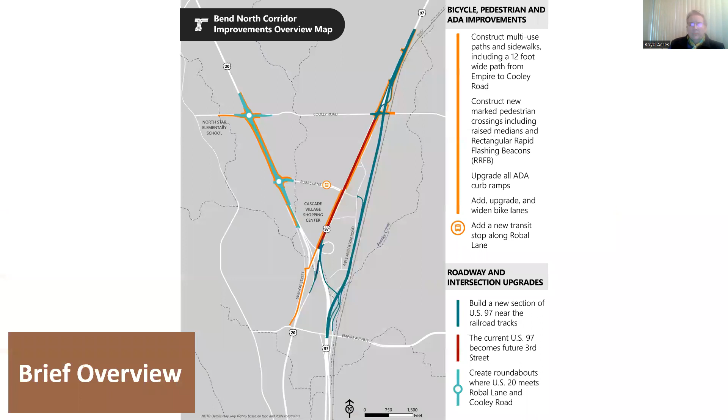This is kind of a 20,000 foot overview of what's going to be happening on this project. You're going to see a couple plan sheets and roll plots, and you'll notice they're going to be oriented differently to make them fit on the screen, so I'll try to remember to tell you what you're looking at and how you're oriented. For this picture, north is up. To give you an overview of the work occurring on this project, you'll see Cooley Road going east-west on the top, Robal just below that, and then the V that US 20 and US 97 make.

Starting on the US 20 corridor, we're building two roundabouts, one at the intersection of Cooley Road, one at the intersection of Robal Lane. You're also going to see multi-use paths on both sides, more on that later. For existing 97, where it's at today, we're going to be doing preservation work, upgrading the ADA ramps and curb ramps in that area, and adding additional bike ped facilities. And then on the east side, the darker blue line is the US 97 realignment. That's going to be kind of like a through route of 97, almost an extension of the parkway, off to the east, and that will get a lot of that through traffic and congestion out of the lights at Cooley and Robal.

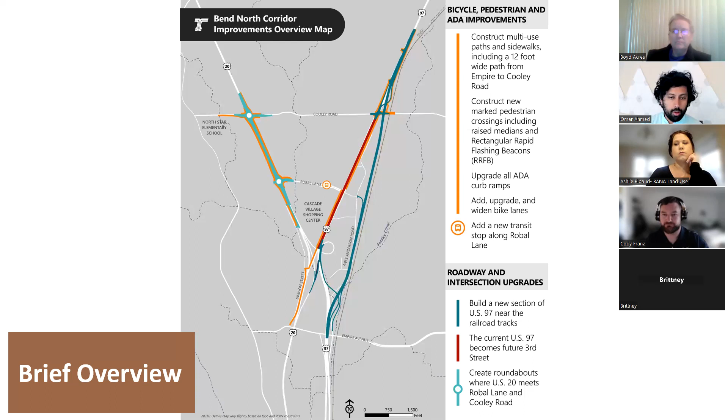Oh, one more thing. We are building a quiet crossing at the BNSF Railroad at Cooley Road as well.

This is to focus in on the bike ped improvements on the project. Again, this is all available on our website in higher resolution if you want to look at it there. Starting on the 20 side, north is up. We're going to have 12-foot wide multi-use paths on either side, running north and south.

You're going to see rapid flashing beacons for pedestrian safety for crossing at 20 and Cooley, 20 and Robal, as well as closer down to Jamison, over by the fire station. You're going to see ADA improvements along this route.

On existing 97, you'll see a 10-foot path and a 12-foot path, depending on the section and area. You'll see that jog over at Robal as well, making sure there's a safe, functional crossing there for pedestrians. That path will continue up north all the way through to the end of our project limit.

It'll jog over again to the east at Cooley and then head north from there before getting to the railroad tracks. Along with the quiet crossing we're building at the railroad tracks, we will have an improved pedestrian crossing at the rail as well.

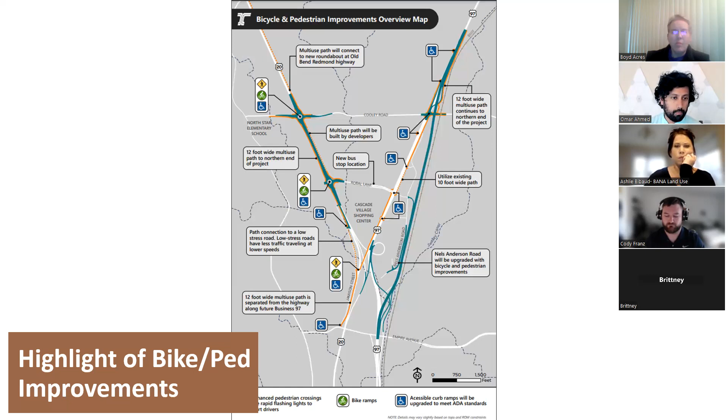So now we're going to get to the meat of the work. This is a colored roll plot of the different phases and stages of construction occurring for our project. In this image, north is to the right. I really like this, so we're going to be coming back to this screen quite a few times throughout the rest of this presentation.

Everything color-coded is reflected in the legend in the top left. That legend is essentially like a Gantt chart calendar showing when we intend for the work to be done. One of the unique properties of our project is that our contractor has been designing and building the work simultaneously, so as a result we're able to get it done sooner. If you've been out on US 20 recently, you've seen them doing quite a bit of work out there while they were concurrently designing and finishing up design for US 97.

So it's one of the benefits of this type of work. You're going to see me focus quite a bit more on the US 20 phases because that's done, concrete, set in stone. The US 97 work is more of an estimate, so we'll get to that near the end.

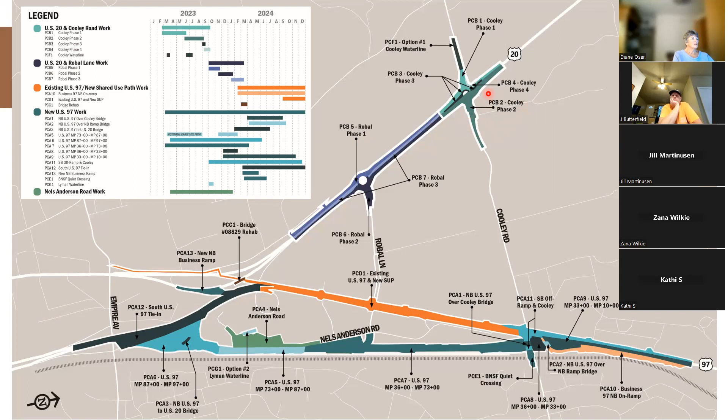So let's start at US 20 and Cooley. I think I have a little laser pointer function I'm going to try to use here. We'll start with where we're at today, which is working in phase 2.

This is a plan sheet, one of our actual construction plan sheets for the Cooley and 20 work. This is stage 2, which you can see is going to be running from April, last month, through Memorial Day. If you've been out there right now, north is to the left now. You'll notice traffic's already pushed to the east half, or sorry, west half of the new roundabout alignment.

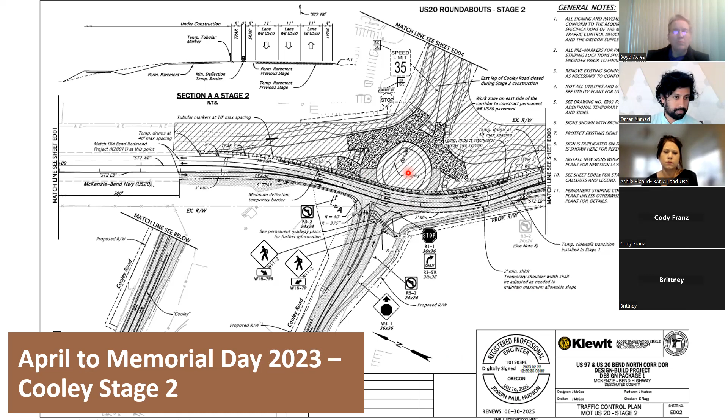Traffic's going to stay there while the contractor works on the east side. Due to that, we do have a closure on the east side. You see the blue hash describing our detour route as a result of that. We expect this to go on right up until Memorial Day, possibly the week after.

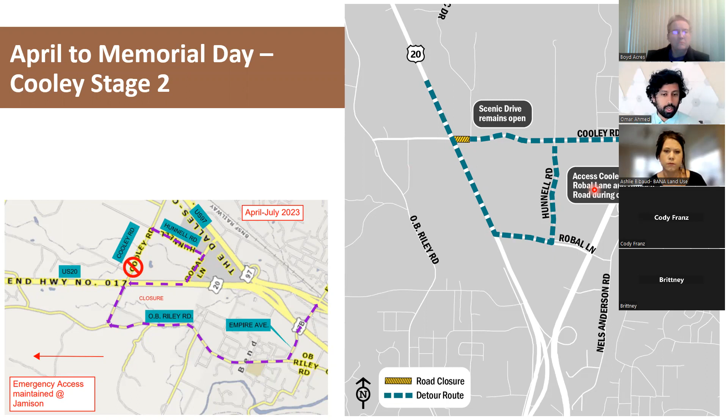Going back, we're going to have our third stage of the Cooley and 20 intersection, which is going to be the center of the roundabout. Here again, north is to the left. You'll see a single lane of traffic going US 20 west/north and a single lane of traffic going US 20 south/east.

So we're maintaining a single lane in either direction configuration while the contractor works in the center of the roundabout and completes that part of the circle.

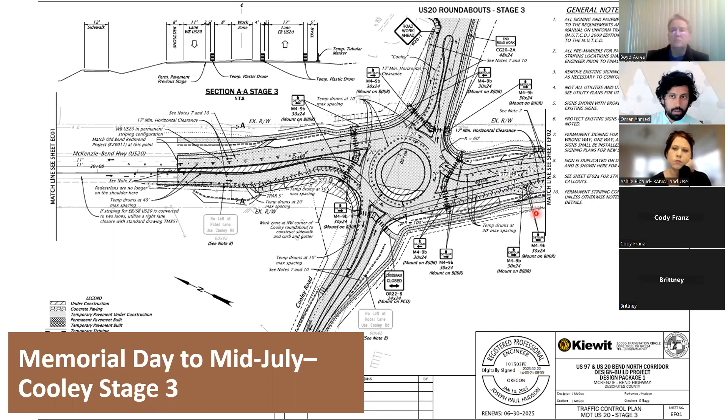Going back, once they finish up the 20 and Cooley roundabout, they're going to hop over to the 20 and Robal roundabout, so we'll talk about those phases. For stage 1 of Robal, you're going to see that start pretty much as soon as Cooley is cleared out. So Memorial Day, and you can expect it to run through mid-July.

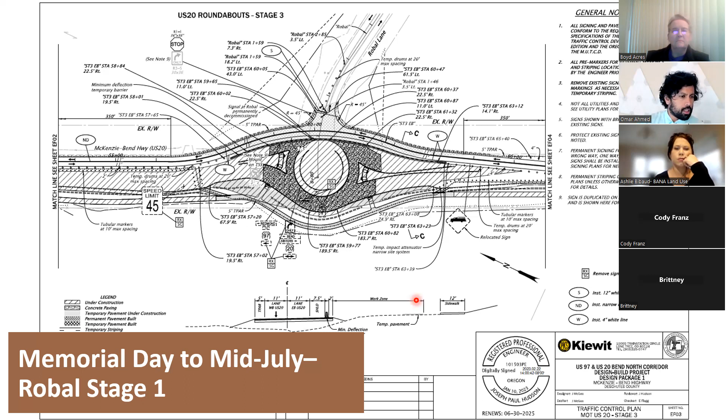In this configuration, both single lanes of westbound and eastbound US 20 traffic are going to be pushed to the east side, the mall side of 20. That will free up space for the contractor to work on the whole west end of the roundabout, which right now is functionally a dead end. It'll continue to stay that way. No major closures for this stage 1.

So as they're wrapping up stage 1, they're going to flip over. Stage 2 will run from mid-July through around mid-September is what we're tracking. Again, north is to the left, and you'll see that traffic is now switched over to the west side, the far side from the mall on 20. Again, single lane in each direction.

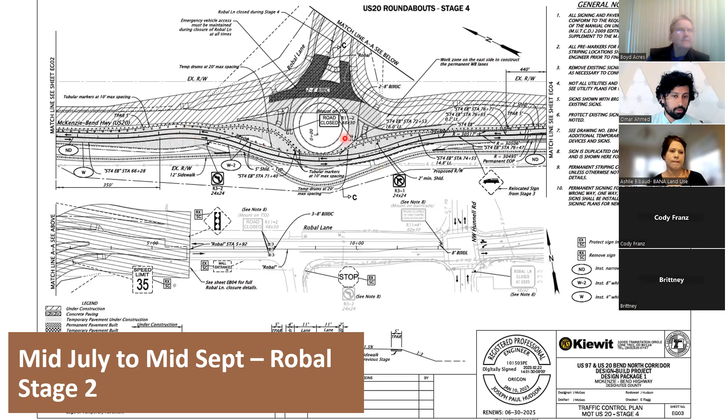So this does require a closure of Robal at the 20 currently light. And this is an image of what that looks like. You'll have to take Cooley to Hunnell and then back. And again, this section of Hunnell is relatively clear.

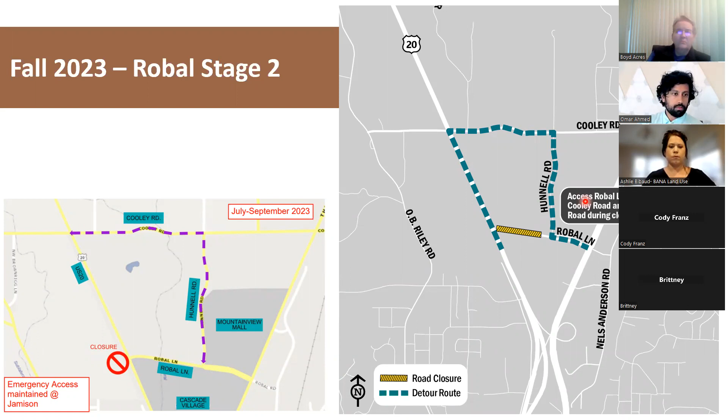So that kind of will wrap up the bulk of the impacted US 20 construction. Once both roundabouts are done, it'll free up room for the contractor to work in this center section here. They would have pushed traffic to either side, and they're going to have to build a median there. So that's what they'll be working on, and that'll continue on down.

We're building a new entrance for the fire station to have a more direct access onto 20. Right now, they have to kind of jog over and then have kind of a weird left turn. So we want to help them out there. Obviously, there's other emergency response services out there that we want to make sure have appropriate access as well.

So are there any questions on the scope of the 20 work or what's happening when? Okay, sounds good. I can't see the chat, so if someone wrote something, just yell at me.

Next, we'll talk about 97 work, which is wrapping up final design, and we'll be starting in earnest here soon. If anyone's been over to Chipotle or Chick-fil-A or anything like that, you would have seen all of the staging and work that's been happening out there already. If you can try to imagine, that's where the new highway alignment is going to be.

Along with that, there's going to be new rebuilding and realignment of Nels Anderson Road. Right now, that kind of used to go to the old Instant Landscaping location. We've actually moved them further up the street, and we're going to dead end that road. So we're going to realign Nels Anderson so the existing businesses out there can still maintain access.

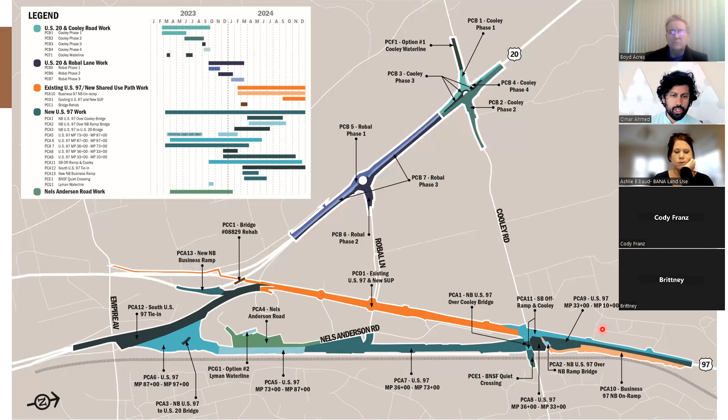Typically, we can limit the duration. It'll more than likely only be overnights, or if we can accelerate it, a couple days max.

Same with the quiet crossing. So what's interesting about railroad quiet crossings is that the railroad's going to actually build quite a bit of that. And they're going to require a full closure of that intersection as well, for them to be able to build that. Typically, quiet crossing work doesn't take too long. Railroad's really efficient about doing it. So again, I would expect something like a weekend closure or a couple nights there.

And then here on the north side, we will have tie-in work. This area in particular is pretty narrow, kind of where the railroad pinches into the existing businesses, close to Standard TV and Appliance, heading up to Space Age and the Volvo dealer. So we will have traffic impacts there.

So for all of those impacts I just talked about, they're all going to be in 2024, which feels like a long time away, but it'll be here before we know it. So again, I intend on trying to come back to the Boyd Acres Neighborhood Association sometime in the fall and talk about those closures and sequencing specifically. Any questions on what's going on 97?

I had a question, I don't know if you've maybe gotten to it. Is there plans in place yet for the southbound on-ramp from Empire onto 97? I know that that's a very tricky spot at the moment, so I was just wondering what the plan was for that.

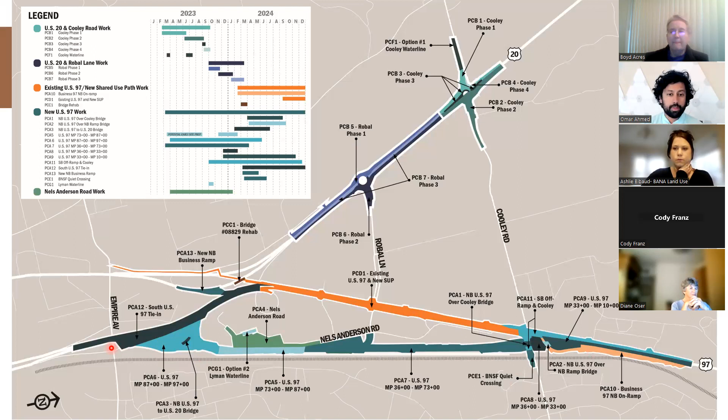Yeah, absolutely, I hear you. I drive through there every day and I see it. But again, that's part of the Empire interchange scope that Ashley asked about, and it would be resolved as part of that project. It's just, again, not a funded project yet.

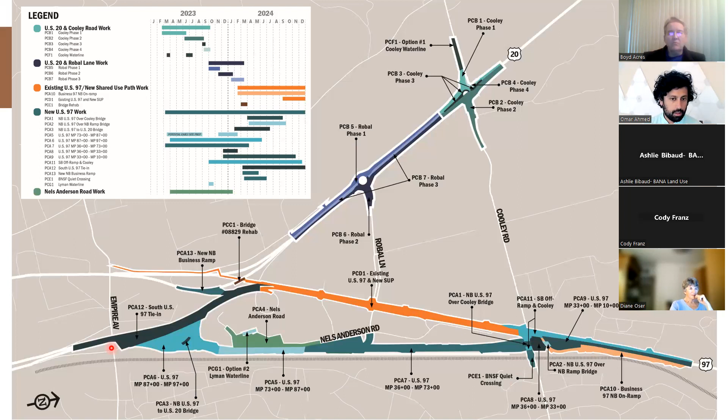Any other questions? So kind of, I don't really have all that much left, but since I was talking to you all, I wanted to make sure you were updated on the adjacent project on 20, which is US 20 Tumalo to Cooley Road. I included the key numbers for that at the top of the screen. This is not my project, but oftentimes they're viewed as a single project because it is almost a single work zone.

So I just wanted to touch real quick on what's going on there. There's 2 roundabouts that are getting built as well as part of this project on US 20. One's at Old Bend Redmond Highway, and the other is in Tumalo at Cook and OB Riley.

So the Old Bend Redmond roundabout, they've been hammering away at that. If you've driven through there, they're already at phase 3. Just a brief description of what that means is that US 20 is 1 lane each direction, just like our project. Old Bend Redmond West will be closed, East will be open, and that will run to about Independence Day. So that's the current configuration right now. For phase 4, the roundabout should be fully functioning, but the west leg of Old Bend Redmond is going to continue to be closed through the end of August for them to get some of that work done there.

Any questions on Old Bend Redmond before I hop over to Tumalo?

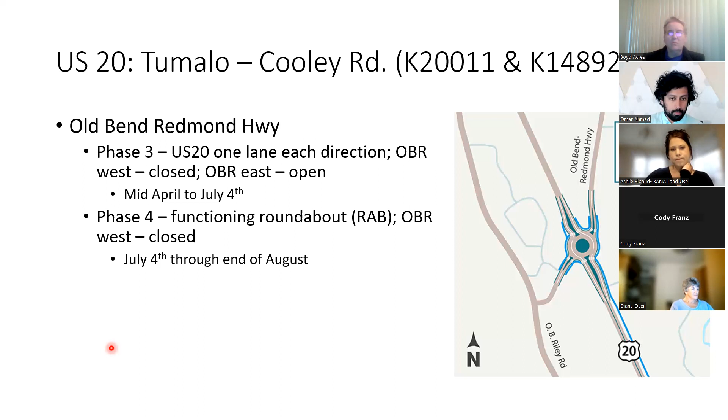Phase 2 is US 20, one lane each direction, right until Independence Day. June 1st, OB Riley will be closed in its entirety for about a month, and your detour for that will be Bailey Road to Tumalo Reservoir Road.

For phase 3, they're going to flip sides. Again, 20 is going to stay one lane open in each direction, and Cook Avenue is going to be closed. The detour there will be 5th through a new temporary signal, and that will run from July 4th through the end of August.

Phase 4, you'll have a fully functioning roundabout, and it'll just be kind of completing the stuff in the middle, the medians, the actual circle, and that should run from August through the end of October. So what that means is the entirety of the 20 corridor should be done with construction by the fall, ideally no later than Thanksgiving. Right now, that's what we're tracking for.

I know a lot of folks have either enjoyed or hated the reduced speed limit, but I can say it's been immensely safer for those traveling through it. So the pain of all this construction on 20 should be over by the end of the year.